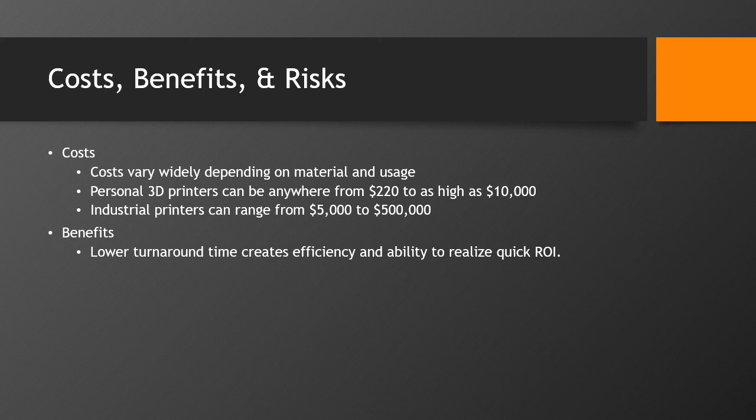Next, we'll talk about the risks. One major risk is intellectual property: the ability to grab plans from someone else and create your own 3D printed item can lead to patent infringement issues. Another risk is electricity usage—3D printing uses about 50 to 100 times more electricity than injection molding of plastics currently used in most industries. This energy use can unfortunately create higher emissions through more energy production.

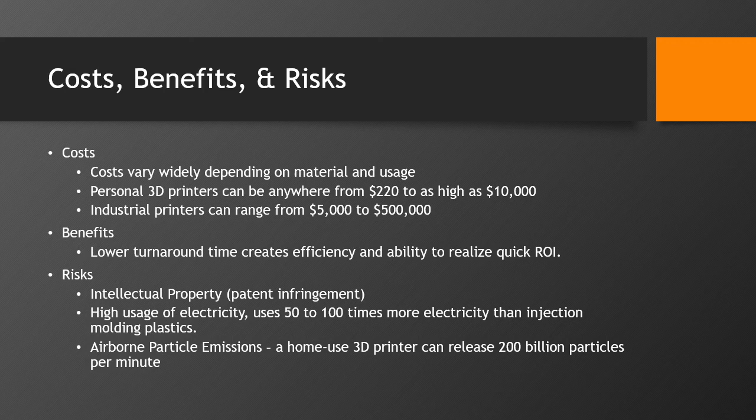Another risk is airborne particle emissions. A home user 3D printer can actually release up to 200 billion particles per minute.

Now here I have a video that I personally believe will show the most impactful application within 3D printing.

X-ray was the first form of medical imaging available to clinicians. Penicillin, the miracle drug of the 20th century, was the first antibiotic. Today, around 5,000 transplants are performed each year. And mapping the human genome has given us a blueprint for human life.

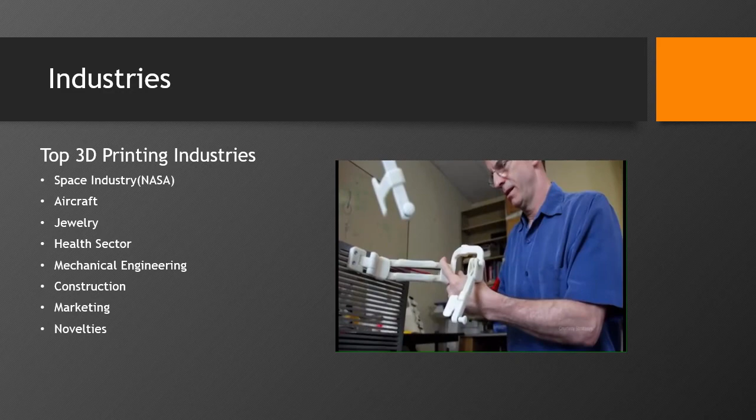Today, 3D printing technology is finding a host of medical applications. 3D printing can help medical applications by saving time, reducing risk, or making patients' lives easier or more comfortable. We used this technology to create a custom-made jacket which helped a little girl recover the use of her arms.

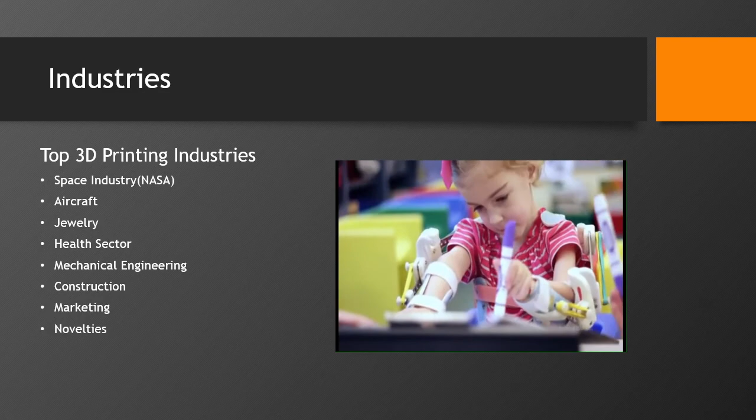3D printing has simplified the customization of complex devices for a range of medical uses. So when you think about cranial fractures, you can use 3D printing as a tool to do a dry run for the surgeon without having to make the patient suffer or take any risk in the operations.

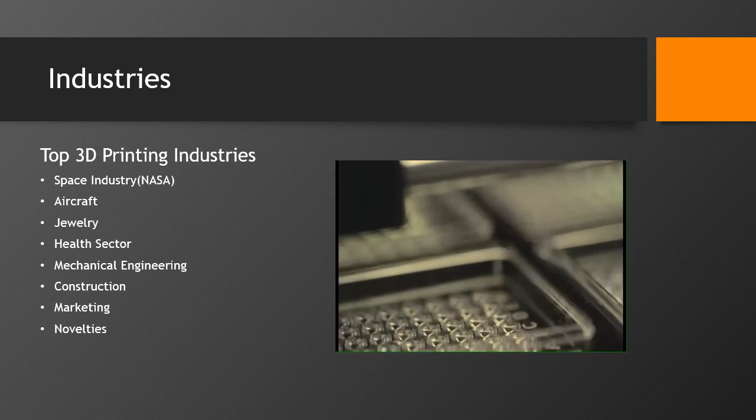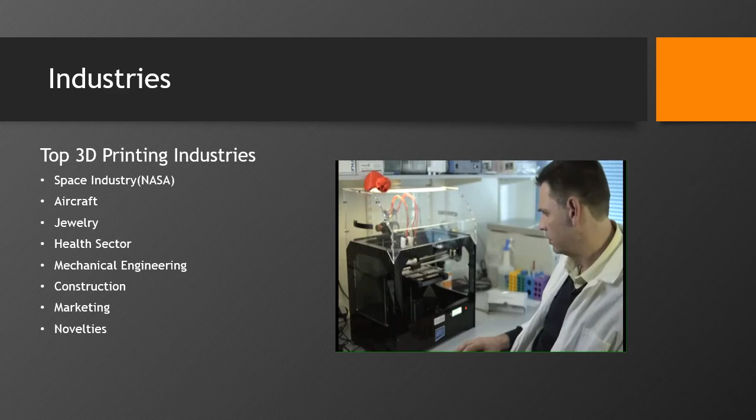And now the technology is being used to create more complex structures. What we're talking about doing here is trying to make liver cells as an alternative to getting them from cadavers. We're trying to print them together on a scaffold to create little mini livers that could be a model for a liver for drug discovery.

But going on from that, being able to create mini livers that one could put in and then take out of the body readily for purposes of helping address acute liver failure. I think we are going to live in an age where there would be simple organs off the shelf available for the health service to provide.

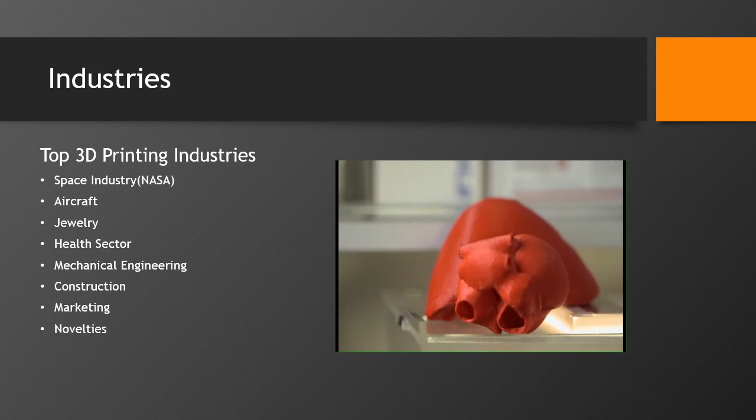If we want to go beyond that and try to create kidneys, hearts, then I think it's going to be even longer. This is no longer going to be our generation, it's our kids' generation.

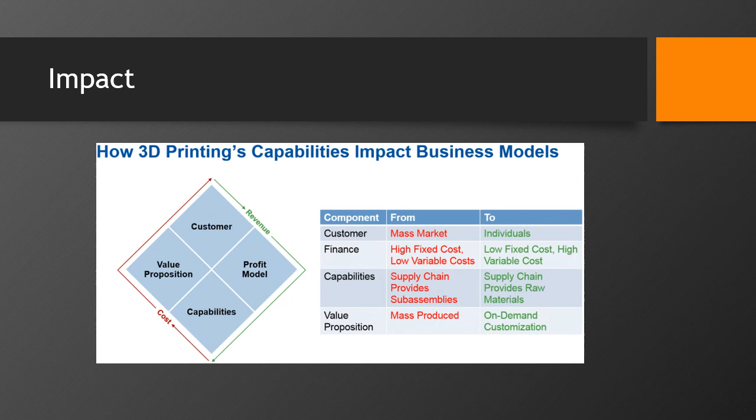Now going on to the positive impacts of 3D printing. As you may see, manufacturing options are only limited by imagination. You have rapid prototyping, maneuvering from design to stage quickly. Manufacturing speeds are shortened, making the product in less time. You have cost reduction and affordability.

Warehousing, less inventory, and less overproduction. There's more jobs for engineers, technicians, designers, and artists. Medical customizable body parts and organs. Better safety when creating parts. And STEM education.

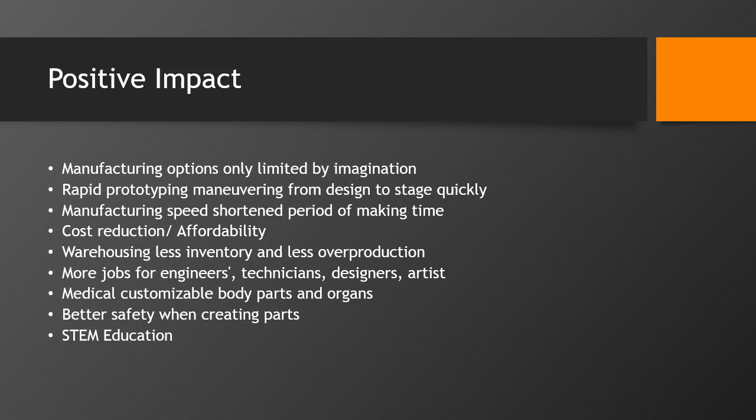The negative impacts of 3D printing. There will be fewer manufacturing jobs, reducing the need for craftsmanship, as well as copyright problems, lawsuits, and infringements, which we will speak on a little bit later. And the ability to print dangerous items like guns or any other forms of weapons.

Next, we will discuss the relevant IT components of 3D printing technology when it comes to information systems. There are 5 components that make up an information system. Hardware, the physical technology that works with information. Software, the brain behind the hardware. There are 2 types, system software and application software.

Data, you can think of data as a collection of facts. Alone, data is not very useful. However, when it is aggregated, indexed, and organized together into a database, it can be a powerful tool for organizations.

People, the end users of the product or service offered by the information system. And lastly, process and procedures. A process is a series of steps undertaken to achieve a desired outcome or goal. A procedure is used as rules or guidelines for using the software, hardware, and data. To fully understand an information system, one must understand how all of these components work together to bring value to an organization.

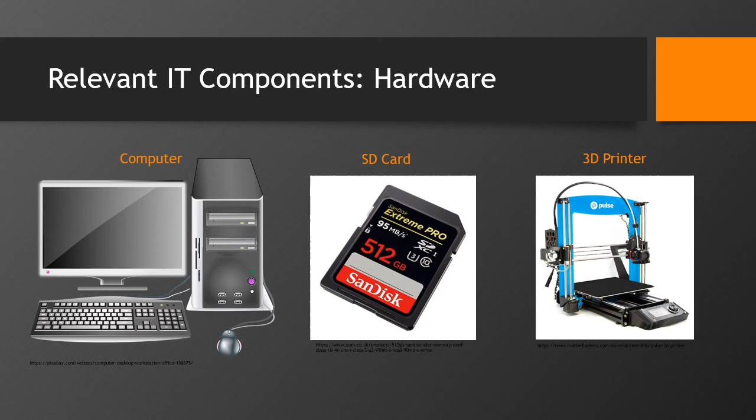To dive into 3D printing technology a little deeper, I will discuss the physical components that go into making a typical FDM 3D printer. This is useful to know if you would like to build a 3D printer from scratch for your business. In a typical FDM printer, you will find the following components.

Filament, which is the material used to create the 3D print. It's typically a plastic type material.

A hot end. This is the part where the filament is melted and extruded into tiny layers. The nozzle is the tip of the hot end where the filament comes out. This portion of the extruder determines the size of the filament that comes out. This size usually varies between 0.25 millimeters to 0.8 millimeters. As you can see, that's a pretty small size.

The extruder is the part that feeds the filament into the hot end. Next, we have the cooling fan. These assist in keeping the temperature of the extruder and all related elements consistent. This ensures that the 3D print will have top quality features such as intended sharp edges and good bridging capabilities.

Next, we have the print bed. This is the part where the filament is deposited to create the 3D object. Typically, this area is heated, which helps keep the plastic warm during the printing process, and it prevents the plastic from warping. A heated print bed is crucial for ensuring the first layer of the print provides a good foundation for the remainder of the print.

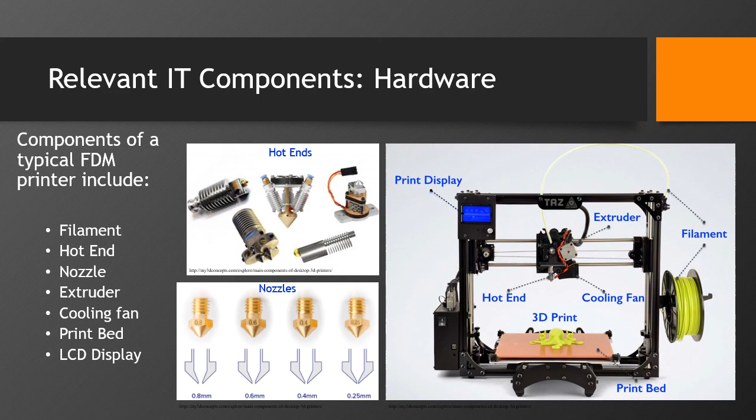The next component I will discuss is the software component of 3D printing technology. If your business is trying to implement FDM 3D printing technology, there are 2 critical types of application software you need in order to use your 3D printer.

The first type of application software you need is design software, which will provide you the platform to design the actual model you need to print. This software will allow you to custom make anything you need to 3D print for your business. This design software is typically referred to as CAD, Computer Aided Design Modeling Software. Some typical CAD modeling software brands you can find on the market today include Autodesk and SolidWorks.

The next type of critical application software you need is slicing software. This software takes the model you want to print and translates it into a language the 3D printer can understand, which is G-code, as we mentioned a few times earlier. This is essentially a roadmap of GPS instructions telling your printer how to lay out the design on the print bed.

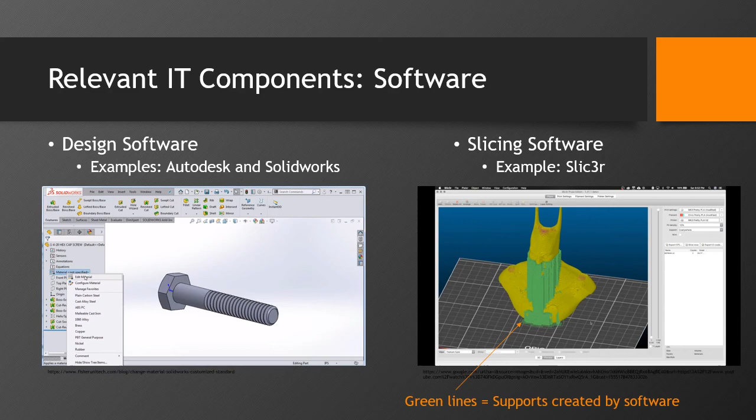The software can also help you fabricate supports for your design, to ensure that overhangs do not get gunked up and the print quality of your model will be top-notch. One popular slicer software you can obtain online for use is called Slic3r, which is completely open source.

The next component I will discuss is the data component. As previously touched on in the software component section, modeling files as well as G-code files are critical for the use of 3D printing technology. Slicing software will first take the model file, typically called an STL file, and convert it into G-code for the 3D printer. An STL file consists of a set of tessellated surface data points that builds the outer surface of a 3D model. A G-code file consists of a dataset of G and M commands that have an assigned movement or action for the 3D printing machine.

For a business looking to heavily implement 3D printing technology into their daily operations, the manager should consider adopting a 3D printing data management system.

This system can be used to create, retrieve, update, and manage all relevant 3D printing data that the company needs. They need to also consider keeping the system internal due to cybersecurity threats. A lot of 3D printing technology is currently open source, which can lead to intellectual property and security challenges for the business. Having a secure and constantly monitored internal data management system, a company can feel safe knowing that their critical product designs won't be stolen or altered by cybercriminals.

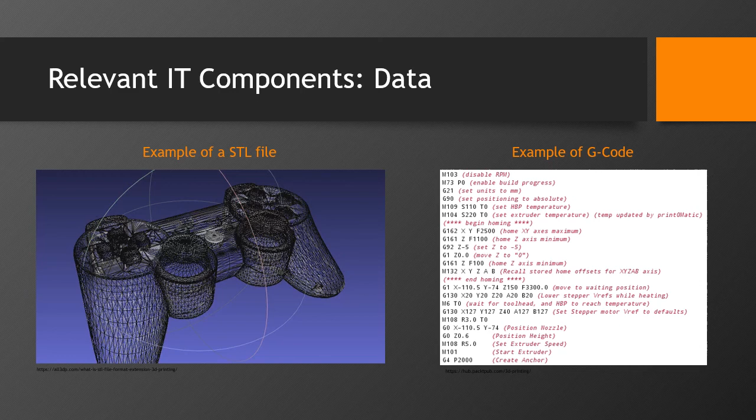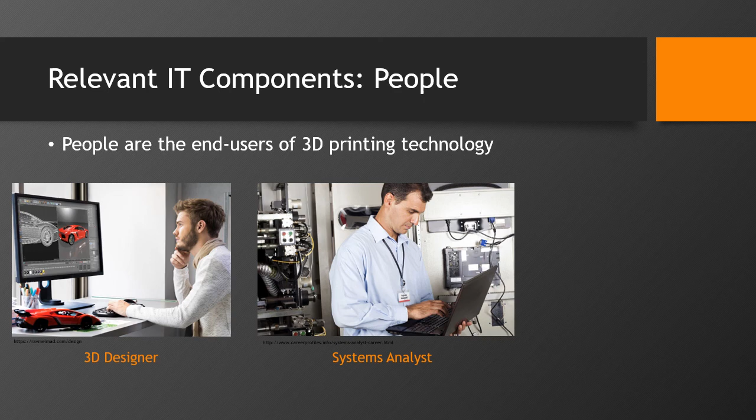Next, I will briefly discuss the people component of 3D printing technology when it comes to information systems. People are the end users of 3D printing technology. If businesses want to implement 3D printing technology, they need designers to model the products to be printed. They need technicians to maintain the 3D printing technology hardware. They need programmers, IT specialists, and systems analysts to maintain the 3D printing software and database management systems. Additionally, management needs to be involved all the way up to the CIO to ensure the 3D printing technology is being utilized to its max potential to create value for the business.

The last component to discuss is the process and procedures component. A company or firm looking to implement 3D printing technology needs to come up with a few business processes and procedures for that technology. For example, the firm needs to come up with a process and procedure for how 3D models should be performed, how the information is stored, how the information is communicated to other departments or customers, and more. Having processes and procedures in place with regards to 3D printing technology provides a way to communicate and apply consistent standards and practices across the business. This will empower the people performing the task, increase efficiency, as well as ensure consistency in the results.

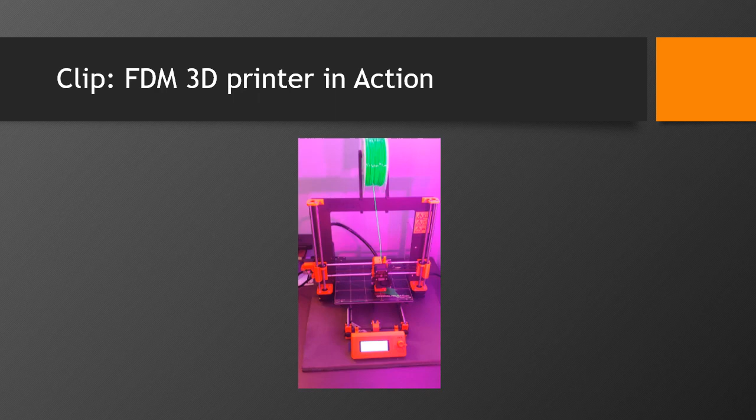Now, having discussed the relevant IT components, here's a short clip of an FDM 3D printer in action.

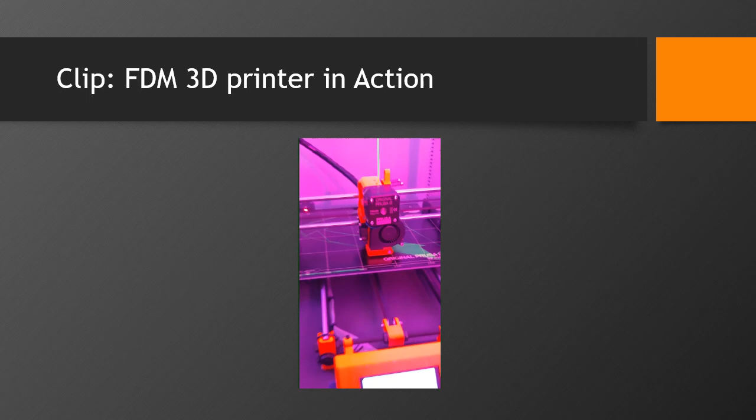Some of the benefits the supply chain sees from 3D printing include shorter time to market, mass customization, localization, and reduced waste. Hasbro, the toy company, is an excellent example as they have introduced 3D printing into their strategy by offering a wide range of customizable 3D printed toys for consumers. Some of the negative impacts to the supply chain include loss of jobs and localization. Localization is both a benefit and a concern because some of the risks include unregulated products, potentially harmful products, and copyright infringements.

Next, we're going to look at the projected market growth for the 3D printing market. The 3D printing market on a global scale is estimated to be worth $8.41 billion by year 2020. The main driving factors responsible for the explosive growth of the 3D printing market include new and improved technologies, a variety of materials ranging from polymers to living tissue, supportive regulations, government funding, and a huge untapped market.

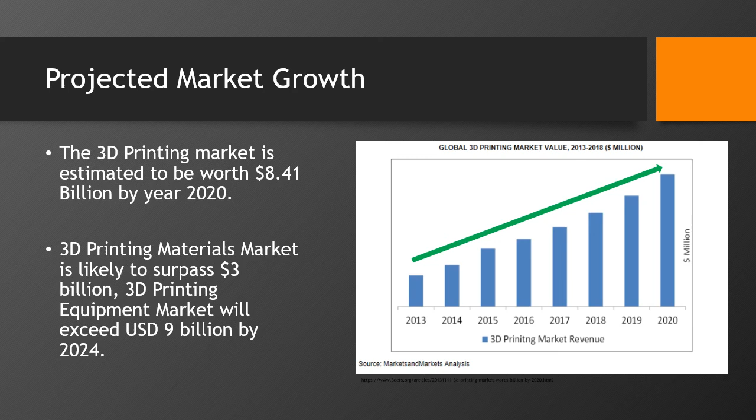Asia is the fastest growing and most promising market for 3D printing. However, Europe is hot on their tail, expected to surpass them in the year 2020.

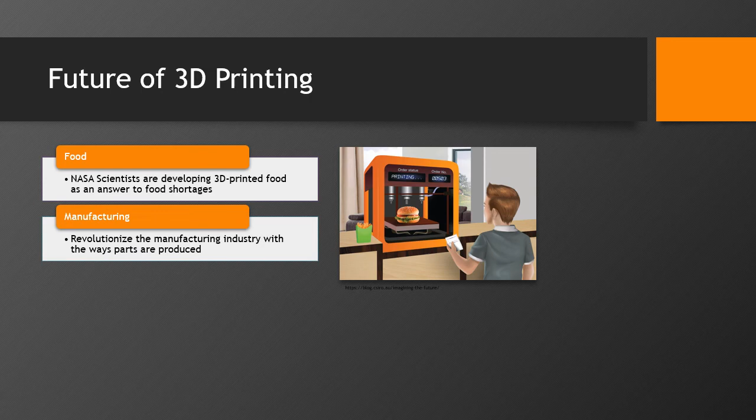Next, we're going to talk about the future of 3D printing. NASA scientists are currently developing 3D printed food as an answer to food shortages. In the manufacturing world, 3D printing is revolutionizing the way parts are produced in the industry. In bioprinting, 3D printing allows people to print organs and living tissues through this technology. And finally, prototyping is a way researchers and business industries can make any amount of prototypes with ease.

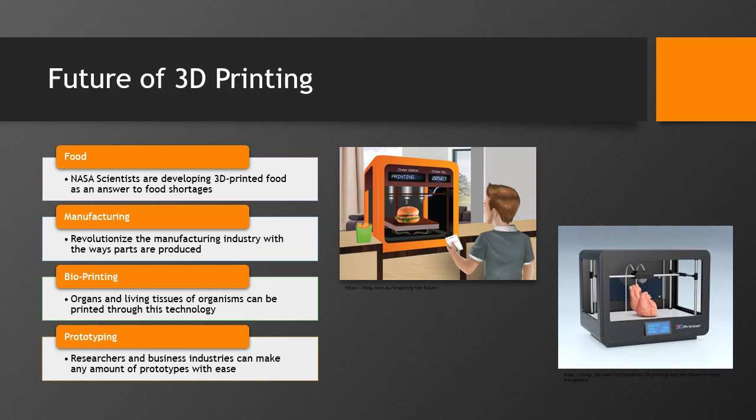In conclusion, 3D printing technology is on the brink of revolutionizing and reshaping the world. Advances in 3D printing technology can significantly change and improve the way we manufacture products and produce goods worldwide. The last industrial revolution led to the world's mass production and the advent of economies of scale. The digital 3D printing revolution can bring mass manufacturing back full circle to an era of mass personalization and a return to individual craftsmanship.